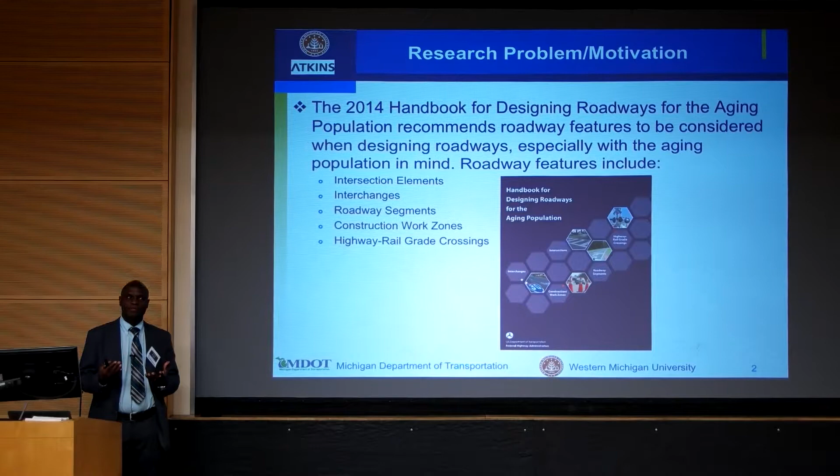Now, what was the motivation of this study? I'm not sure if all of you are familiar with this handbook, but the current version is the 2014 handbook for designing roadways for the aging population, produced by the Federal Highway Administration. It has guidelines on what roadway features a roadway designer should think about when designing a roadway with the aging population in mind.

They have different recommendations for different roadway features: intersection elements, how you should design intersections so that older drivers will be accommodated well, interchanges, roadway segments, construction work zones, highway rail grade crossings. So that handbook is out there.

Now, the Michigan Department of Transportation thought about their current design standards, and the question was: are these Michigan roadway design standards consistent with what the handbook is recommending? So there was a need to identify roadway design features or standards in the Michigan roadway design manual that are not consistent with the handbook, so that we can make those recommendations.

But how do we do that? We had to look at different things. One was crash data. What do crash data say? Do they indicate areas where older adults might be having issues? And are those areas or roadway features the same as the ones recommended in the handbook? And are MDOT standards for those roadway design features consistent with the recommendations? So we had to look at crash data.

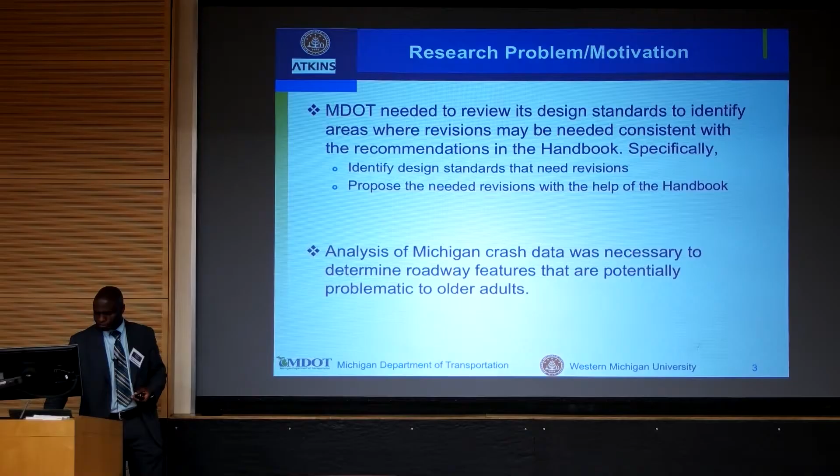So we had these two objectives: analyzing the association of older adult crashes with roadway features, and providing recommendations and developing roadway design guidance. Now, I'm not going to talk about the recommendations we made, but I will just end my presentation on what we found from the crash data.

And the final report for this project is actually online, so if you are interested in more details on the specific recommendations we made for Michigan Department of Transportation, you can access that.

But among the other tasks that we did for this study was a survey of drivers in Michigan. We wanted to ask them what they consider to be an issue for them, and compare older adults versus young drivers to try to see what could be issues specific to older drivers. But I'm not going to present the survey results. In fact, there is a poster—one of my students has a poster out there which documents everything about the survey. So take time to check that poster.

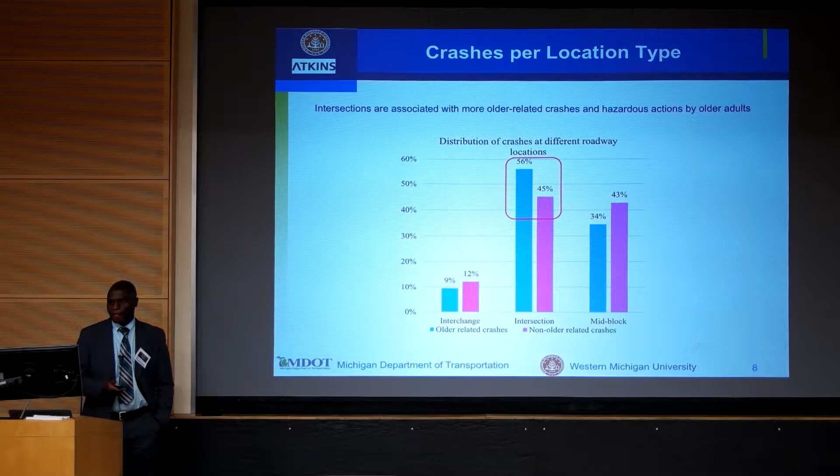So just a quick summary of findings from general crash data analysis. When we looked at roadway characteristics, we saw that older drivers were more likely to have a higher proportion of crashes in multi-lane roadways compared to drivers who are 64 or younger. Older drivers have a higher proportion of crashes on roads with no access control compared to the other age group. And on environmental characteristics, we found that a higher proportion of crashes involving drivers 65 and older occur in daylight.

When we did a survey, I'm just going to give you one result. We found that many older adults avoid driving during the night. So I think it makes sense that most of the crashes occur during the day, because most of them are driving during the day, not during the night, compared to the other age group.

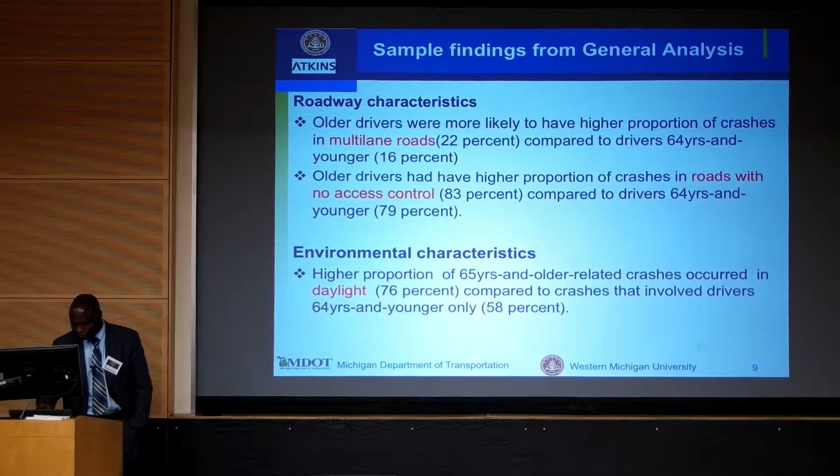Drivers 64 years and younger were more likely to be intoxicated compared to older adults. And crashes involving drivers 65 and older, most of them were turning, especially making a left turn, compared to the other age group.

Now I'm going to go into the detailed crash analysis, but I need to clarify one thing here. We focused on two-vehicle crashes involving one driver 65 years and older and one driver 64 years and younger. Why? If you have a lot of crashes occurring at a given location involving a specific group of drivers, there could be multiple explanations of why that is happening.

One, maybe that area is problematic for that age group - that could be a reason. But the other reason could be that there are so many of those drivers of that group in that area compared to other drivers.

So exposure is very, very important. You have to know how many older adults are driving in a specific area before you try to pinpoint whether they have a problem there or not.

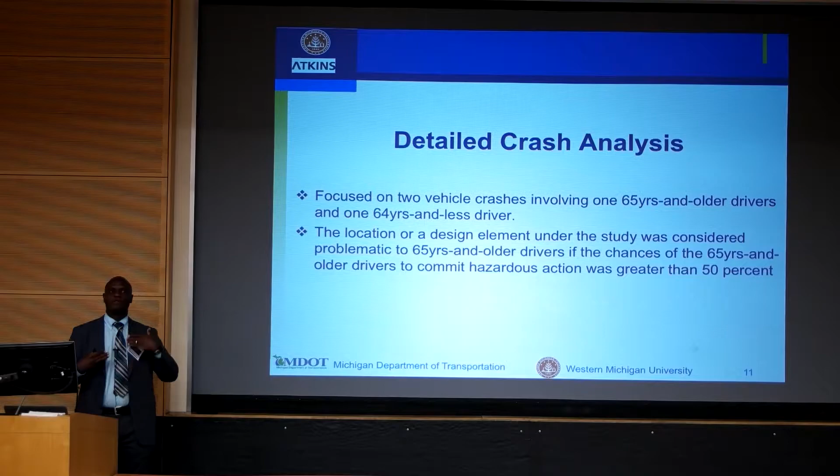So the results I'm going to present are basically showing locations where, looking at crashes involving only two drivers, a young driver and an older driver, we examine the percentage of drivers who were responsible for the crash, because that could be an indication that they have an issue with that area. Otherwise, it should be 50-50.

So we looked at different roadway design features. For intersections, we looked at several design elements: intersection skewness, left-hand offset, and raised medians at intersections. For mid-block, we looked at driveways away from intersections, median crossovers, transition areas, curved segments, parking areas along the roadside, and auxiliary passing lanes. For interchanges, we looked at the entrance and the exit.

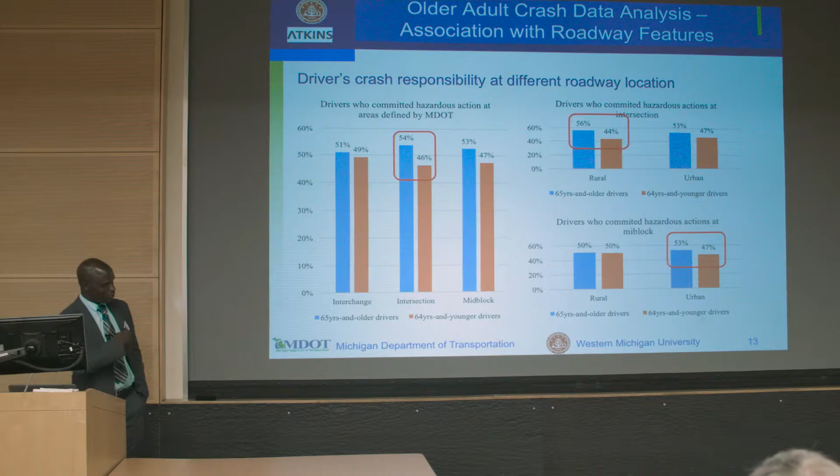So I'm going to present a few results from what we looked at. This one shows drivers' crash responsibility at different roadway locations. If you look at the interchanges, you can see it is 51/49. The orange is young drivers and the blue is older drivers throughout my presentation. But when you look at intersections, you start seeing a huge difference - 54% of older drivers are responsible for a crash at intersections compared to the other age group. And for mid-block, it's about the same.

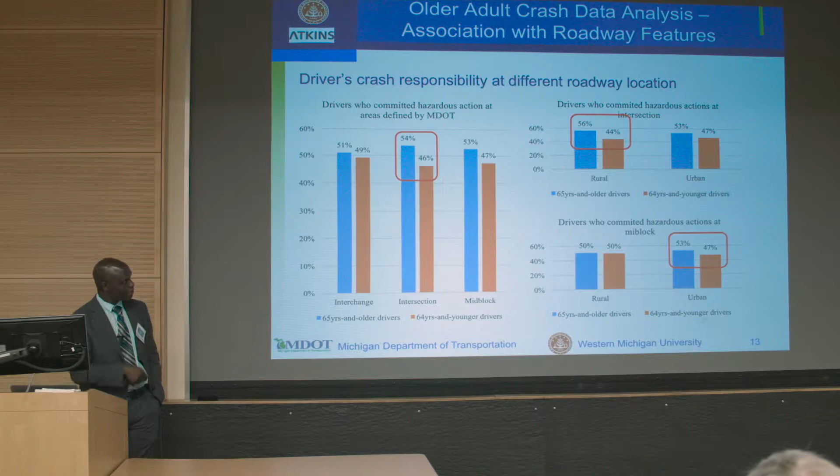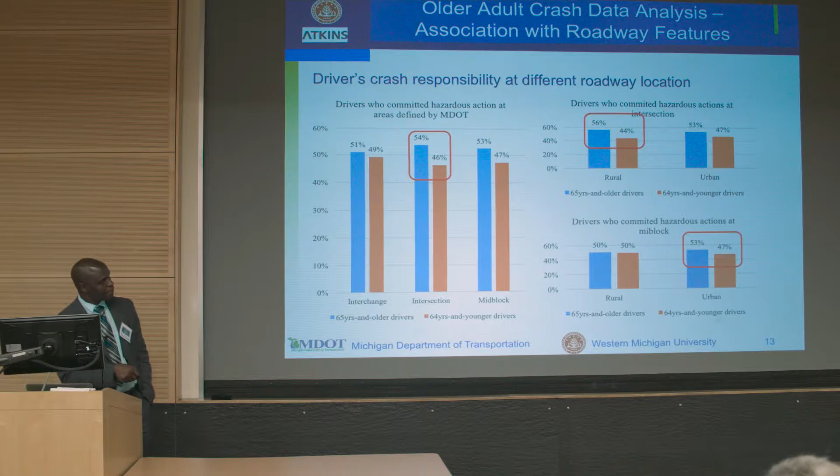How about areas? If you look at rural versus urban, drivers who committed hazardous actions at intersections, there is a difference, not a big one, between rural and urban intersections: 56/44 and 53/47. But when you look at mid-blocks, in rural areas it's 50-50%, and in urban areas you have a higher percentage of older drivers committing a hazardous action.

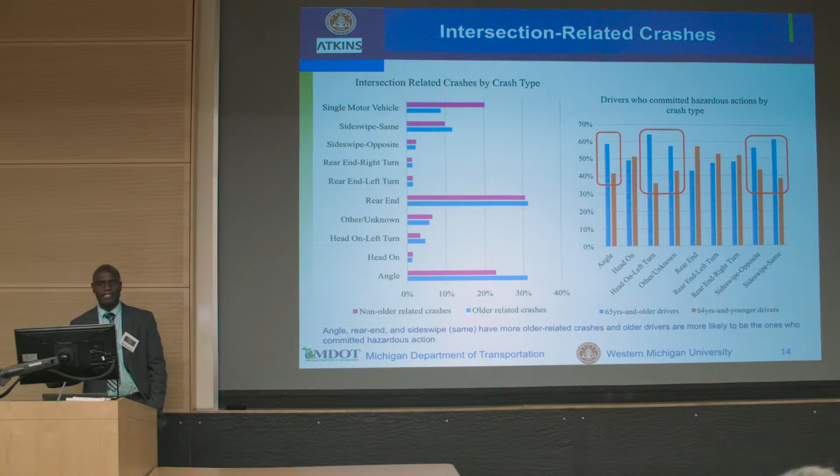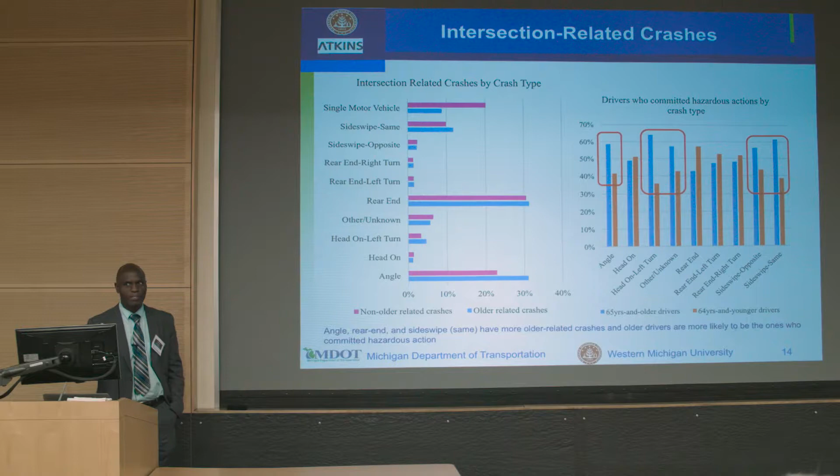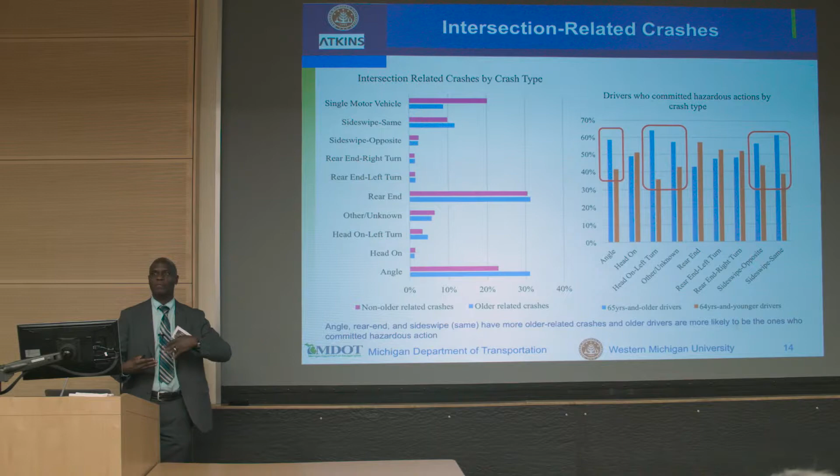Now, we wanted to know for intersections what type of crashes older drivers who commit hazardous actions are involved in. We found that angle, rear end, and sideswipe same-direction crashes have more older adults involved, and they are the ones committing the hazardous action, which means those types of crashes, or any feature leading into them, could be problematic for older adults.

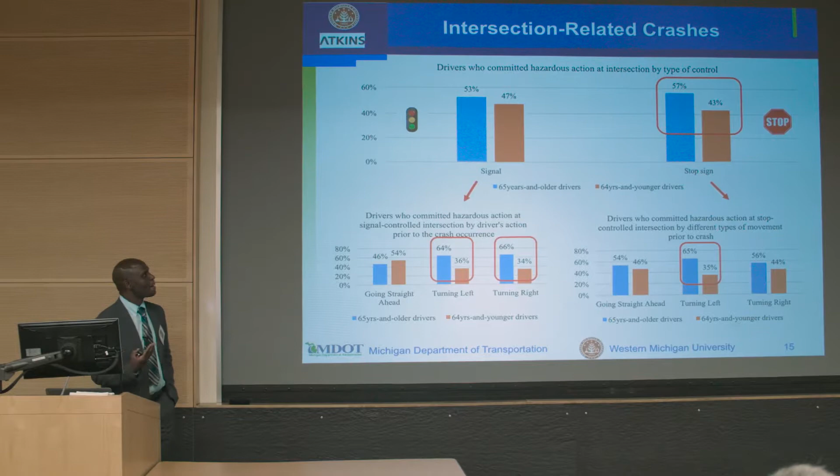Drivers who committed hazardous actions at intersections by type of control, signal versus stop control. At signalized intersections, the distribution is different, but not as different as at stop control intersections. You have more older adults committing hazardous actions at stop-controlled intersections.

I think that is probably easy to explain, or at least we can suspect something, that when you have traffic signals, as long as every driver is protected - for example, a protected left turn - it's not going to be a problem for an older adult. But once you have a control where someone is required to make a quick decision, that could be a difference maker between older and younger drivers.

So when we looked at drivers who committed hazardous actions at signal-controlled and stop-controlled intersections by movement, we found that when someone is making a turn, older adults are more responsible for those types of crashes, which means any intersection feature associated with turning is important when designing a roadway with the aging population in mind.

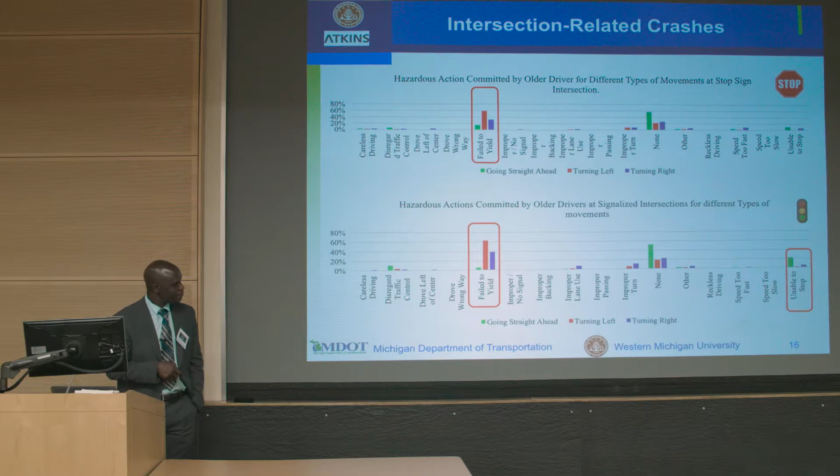So we looked at what hazardous action was actually committed by older adults, at both stop-controlled and signal-controlled intersections. We found that turning left was the main movement, and the main hazardous action was failing to yield. That is for older adults.

Now we started looking at specific design features - intersection skew. The FHWA guideline from 2014 states that the minimum intersection skew should be 75 degrees. MDOT says minimum is 60, desirable is 75. So we decided to look at intersections and figure out whether intersection skew could be an issue.

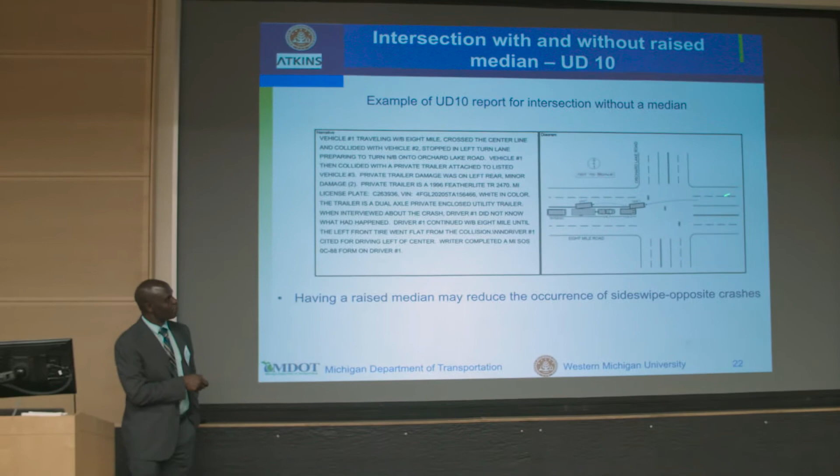Now, this is an example of a crash that could be prevented by a raised median. This was an older adult - it's an actual crash report, and this is an actual drawing by the police. This older adult was moving this way and sideswiped the opposing vehicle. What if there was a raised median here? Maybe that wouldn't have happened.

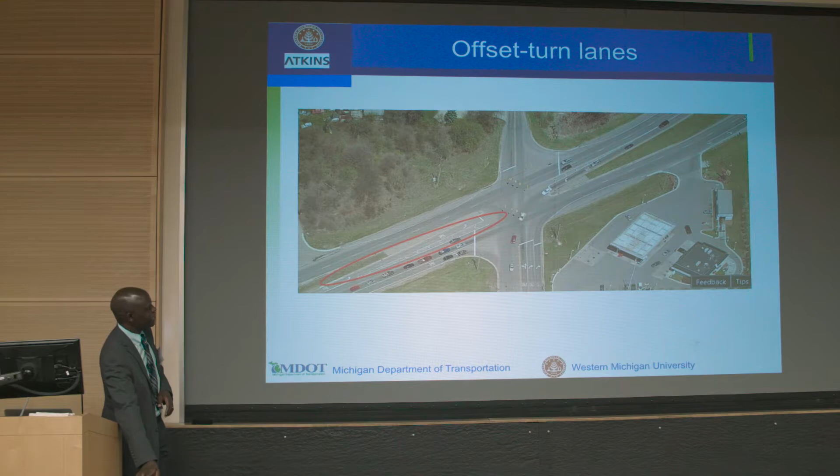The other thing that we looked at was offset turn lanes. This is the case when someone is at an intersection and maybe they're making a permitted left turn, and one vehicle is trying to make this left turn and is stopped here. You're supposed to be looking for vehicles that are coming through, and sometimes you may not be able to see them if you are in the same line as the opposing left turners.

So the solution is offsetting the left turning lane so that if you are making a left, you're going to be here. So you have enough space to see what is happening in the opposing direction, and you can make a safe turn when you decide to do so.

So we decided to look at these kinds of roadway design features, and we picked 286 state trunk lines, and we had only 6 intersections which had offset turn lanes. What we found was that when there is no offset, 58% of the time an older adult is responsible for a crash, but only 55% is responsible when there is an offset.

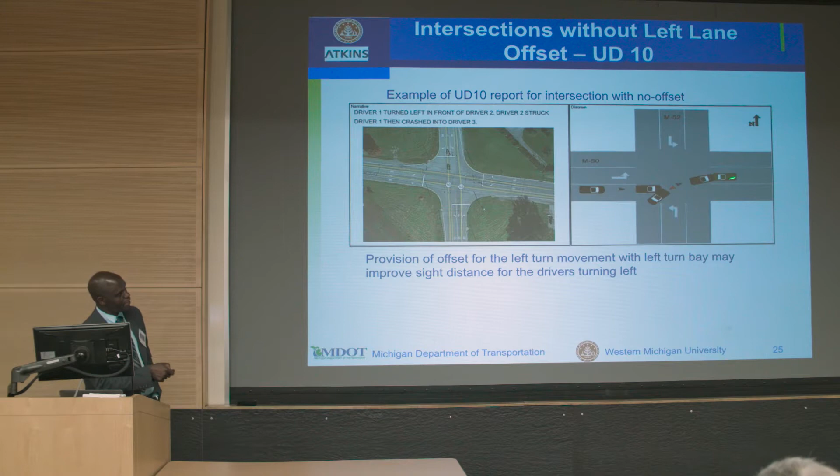This is again another example of what I was explaining. If you are stopped here and there is another vehicle in this direction, and you're trying to make a permitted left turn here, you may not see the through moving vehicle in the opposing direction. But if you have an offset left turn lane, it could be easier for the driver to see what is going on in the opposing direction.

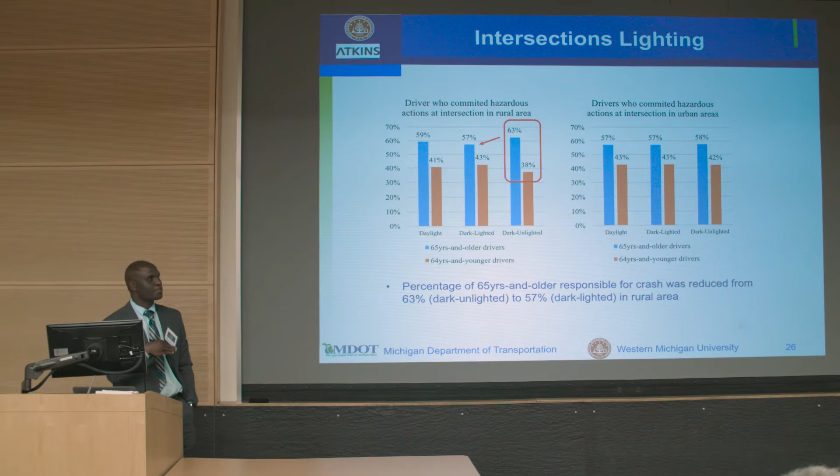Intersection lighting is another design feature that is important. So when we looked at drivers who committed hazardous action during daylight, dark lighted, and dark unlighted conditions, what we found was that when it is dark unlighted, you have more older adults committing hazardous action, when you look at two vehicles involving one young and one older adult.

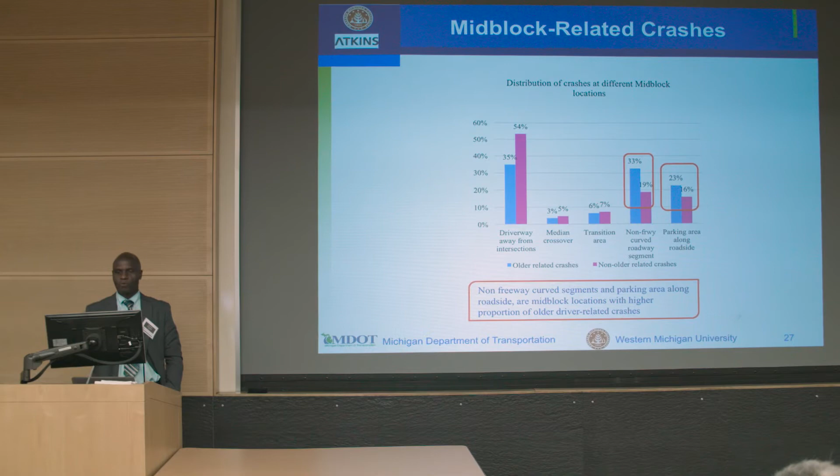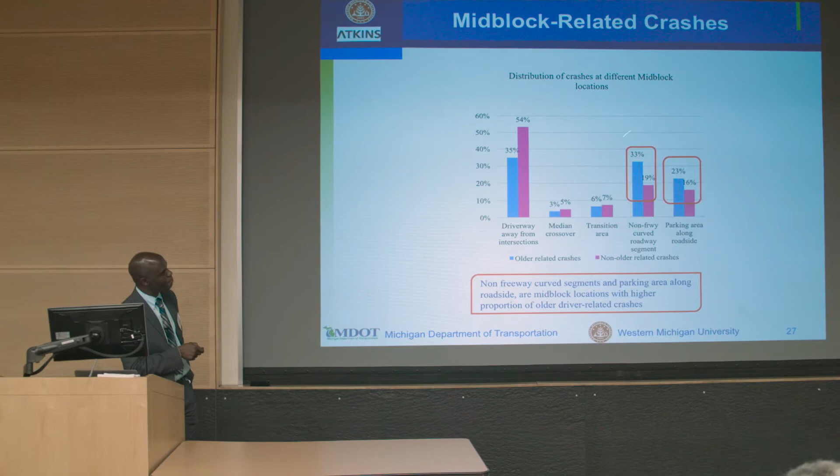Mid-block related crashes: we looked at which location of a mid-block has a lot of older adult crashes. What we found was that older adult related crashes are more common on non-freeway curved roadway segments, and of course we have the parking area along the roadside.

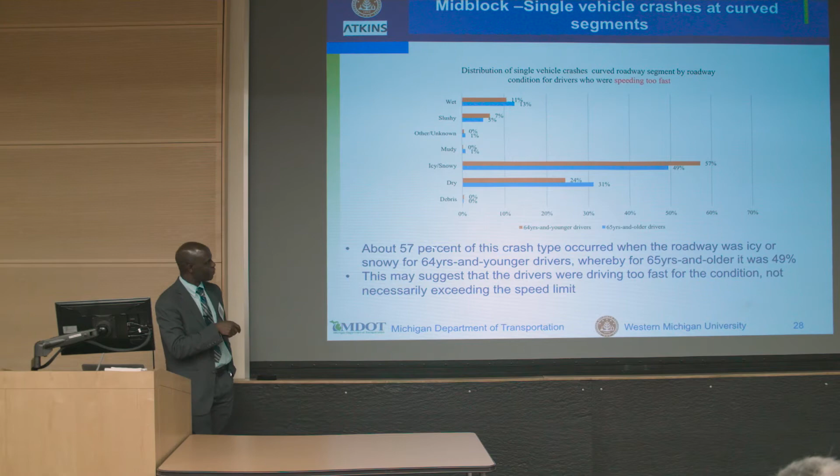So we decided to look at single vehicle crashes at curved segments which involved an older adult, to see what the environmental conditions were when the crash occurred. So we have the distribution by environmental condition, and what we found was that about 57% of this type of crash occurred when the roadway was icy or snowy.

And what happened was basically these crashes are coded as speeding too fast. So speeding too fast was occurring when the roadway was icy or snowy, for 65 and older as well as younger drivers.

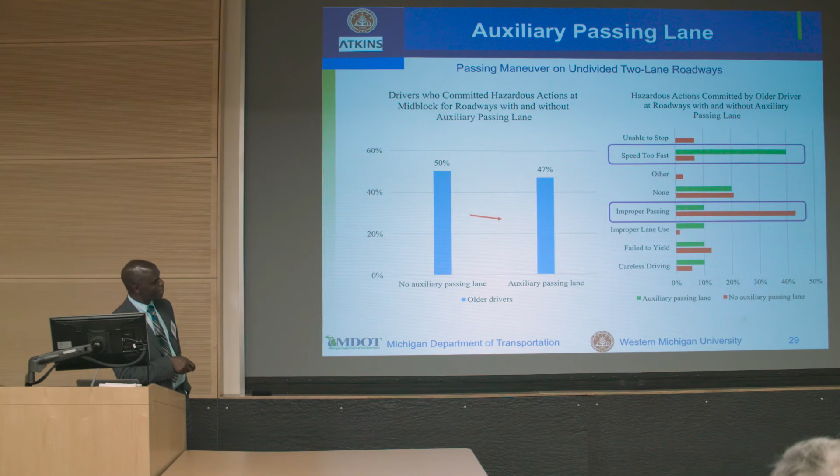The other thing that we looked at was, when you have a 2-lane undivided roadway, what is the advantage of an auxiliary passing lane? So when we looked at roadways where there is no auxiliary passing lane, we found that 50% of older adults had committed hazardous action, but where we have an auxiliary passing lane, only 47% committed hazardous action. For the sake of time, I'm going to go into the summary.

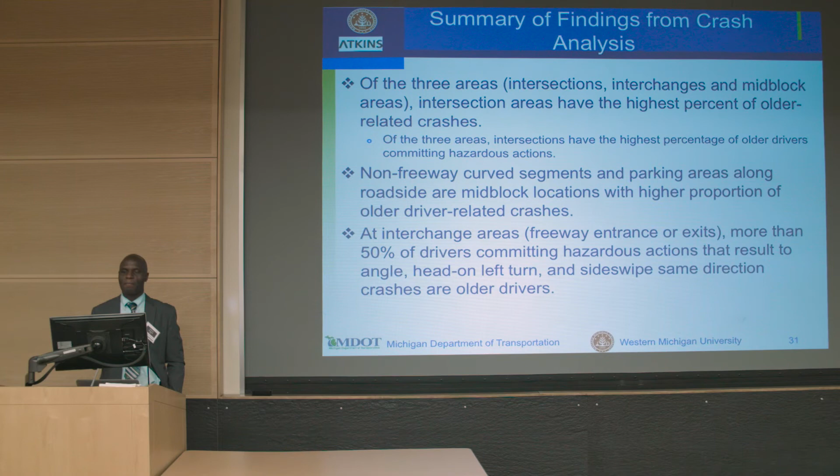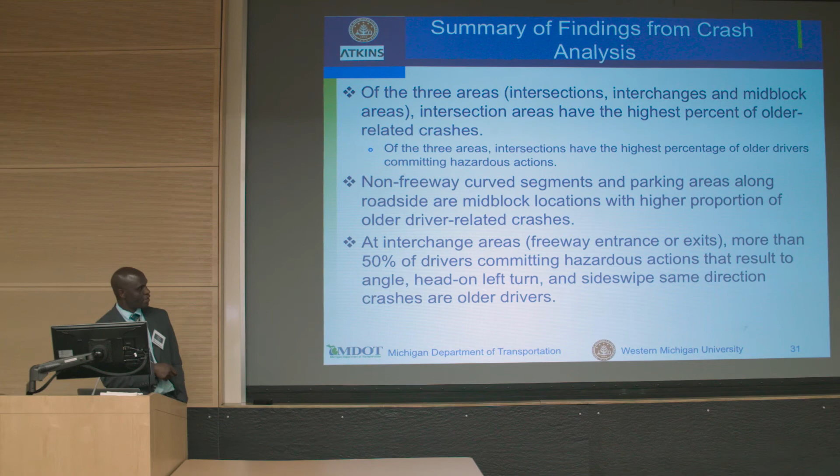So from the crash analysis, what we found was that intersections might be more problematic to older adults. Non-freeway curved segments, and parking areas along roadsides and interchange areas are also problematic to older adults, and the specific type of crash where older adults are committing hazardous action is angle, head-on, left turn, and side swipe same direction.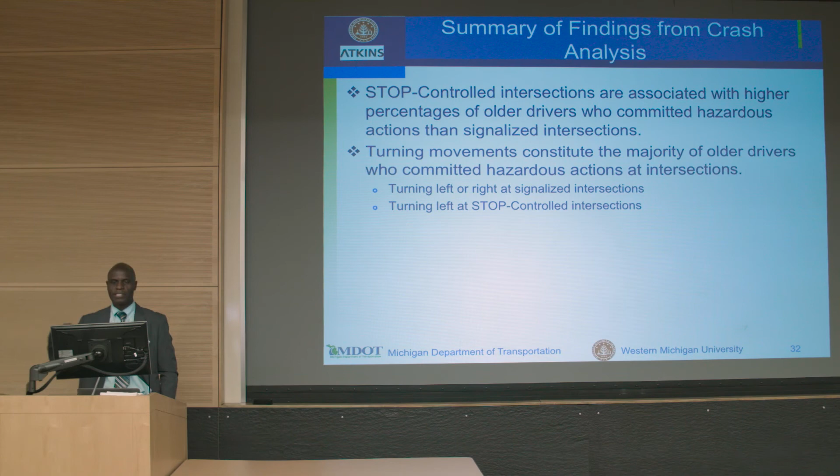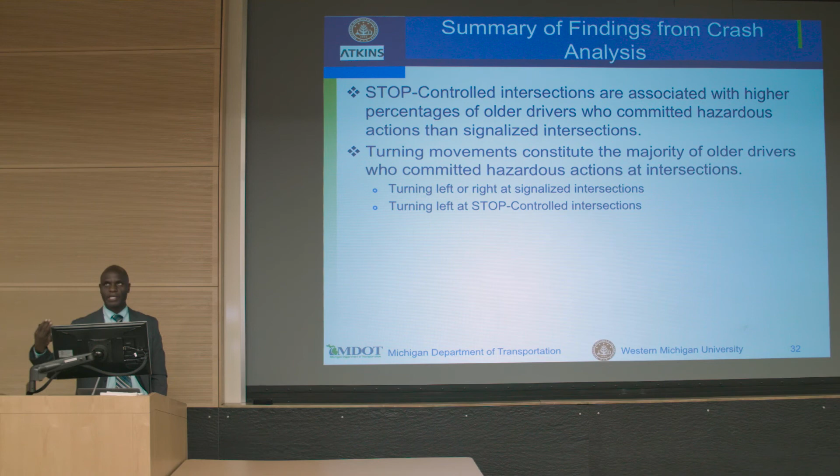Stop control intersections are associated with a higher percentage of older drivers who committed hazardous action compared to signalized intersections. Turning movements are an issue for older adults, so any design feature that helps an older driver make a turn safely is very, very important.

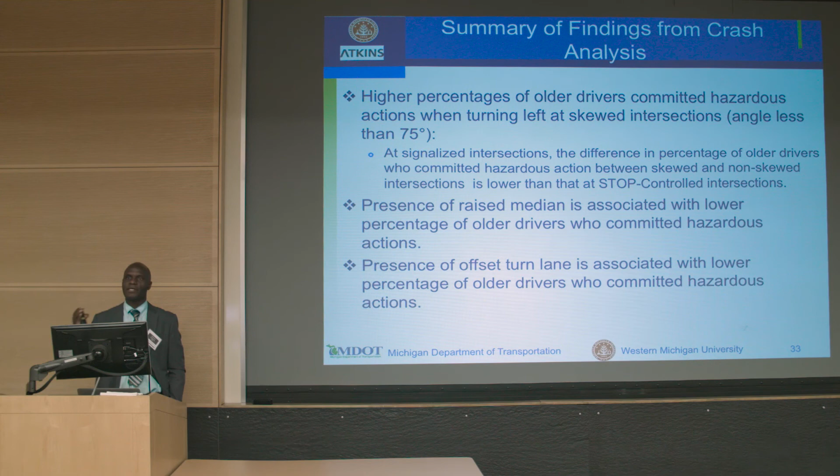Intersection skewness is something that is very, very important. But as we saw, when you have a signal, you might reduce the impact of intersection skewness. The presence of a raised median and having an offset left turn lane might help in reducing crashes that involve older adults. Thank you.